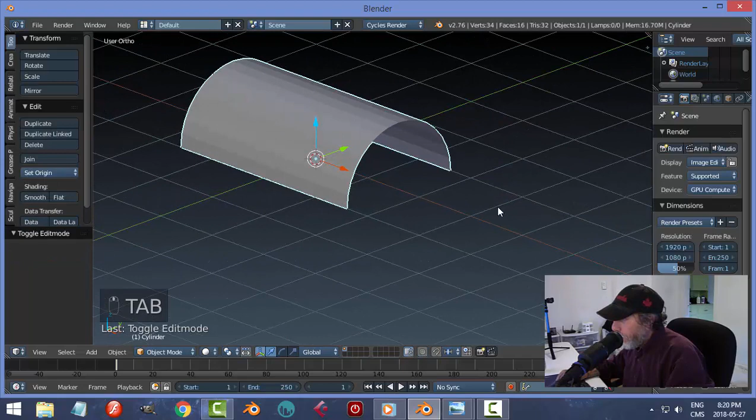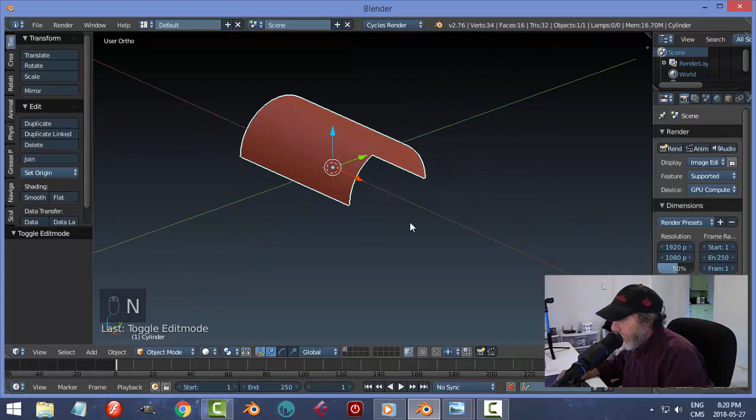I don't think I need to do anything more than that. Let's get out of wireframe and go into solid view, and actually we can go right back to object mode for a moment. Let's get rid of this grid floor. Hit N to get rid of the grid floor and choose display, uncheck grid floor, and let's switch to shading, MatCap, ambient occlusion, and we're going to choose a shader that will work well for us, that one, and close that. I'm going to be deleting that as well, by the way, soon.

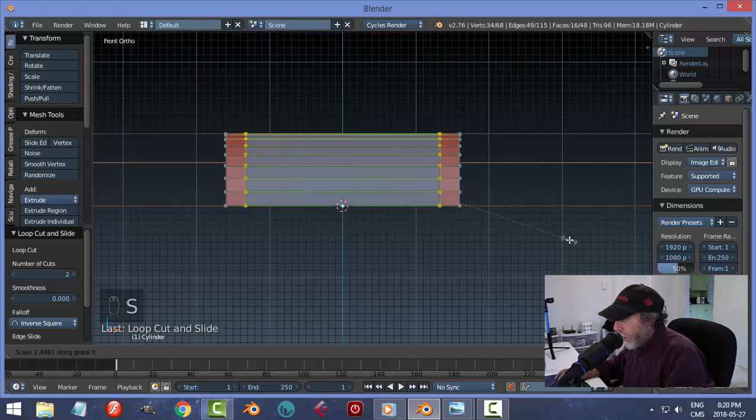First of all, what we're going to do is go into edit mode in front view, and I'm going to put in a couple of edge loops. So I'm going to go Control R. It's going to put one right down the middle, but I'm going to scroll my mouse wheel up once so I get 2 of them, and I'm going to left click and then right click to accept. I'm going to scale in the X and pull it out till I have something like that. I want to set this up so that I can do the side parts.

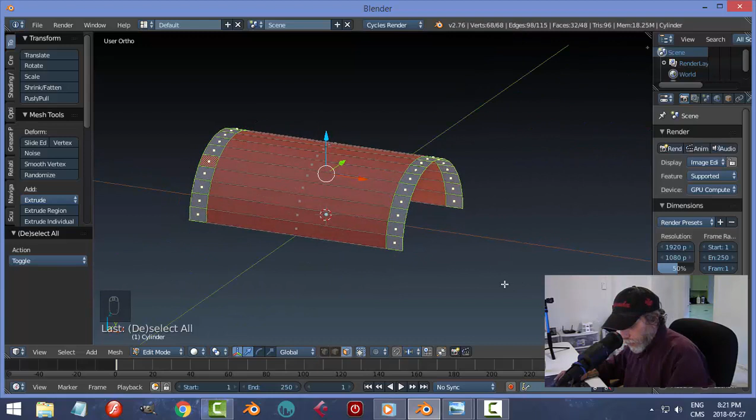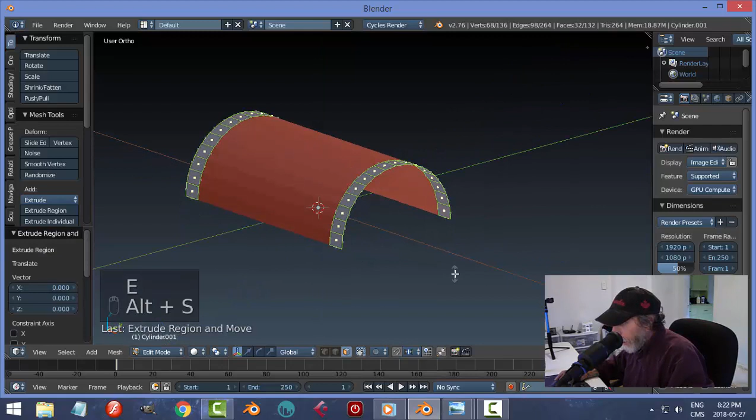Now look at this one, these things here. I've put these edge loops here so that I can select all of these polys and all of these polys, and I'm going to go Shift D to duplicate them, then P and enter, and go back to object mode so that I've made these a new object on their own. What I'm going to do now is go into edit mode and hit A to select them all. I'm going to hit E to extrude and Alt S and pull with my mouse, and that's going to pull them out. So just decide how far you want these to come out to resemble these things.

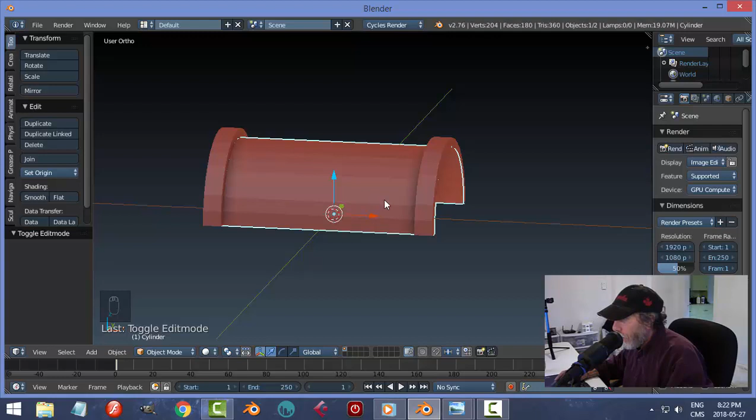All right, cool. Now I think the last thing I'm going to be doing with this is going back into edit mode, and one more time going Control R and putting an edge loop right there in the middle, accepting it and just leaving it right in the middle. I now want to actually keep that, so it's selected, and I'm going to go P and make it a new object. So I've got that.

I can now actually delete that. These are in position relatively, and I've got that. I'm going to use this to make the wood that's going to form the top of this.

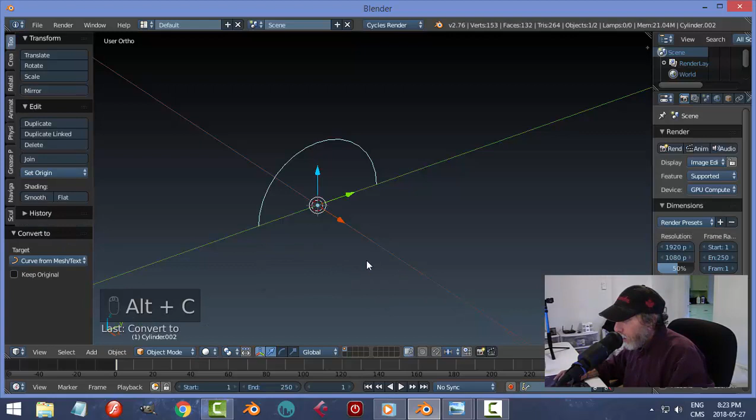I can now hide those, but in order to use this I'm going to convert it to a curve. I'll go Alt C, curve from mesh, and that will put a new icon up here that wasn't there before, this one. So I know it's a curve. Or you can go to edit mode and see that it's a curve.

Now my 3D cursor is still right in the middle. I haven't moved that, and that's great. So I'm going to go Shift A, Mesh, and bring in a plane. I'm going to scale this in the Y until it's around the width of a board that I would want to have arrayed around this curve. Whatever, just experiment with how wide you want that to be.

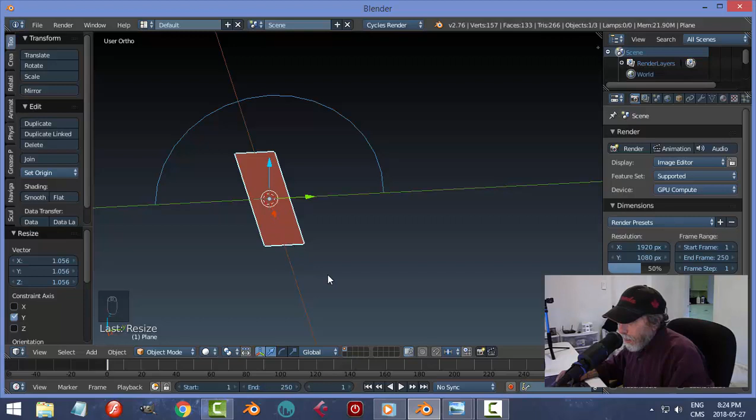But in order to bend these around a curve, I need to put more geometry in this. If you didn't understand that, just watch what I'm going to do. I'm going to go into edit mode again. I'm hitting tab and using this pie menu to switch from object to edit mode, but you can do it right down there too.

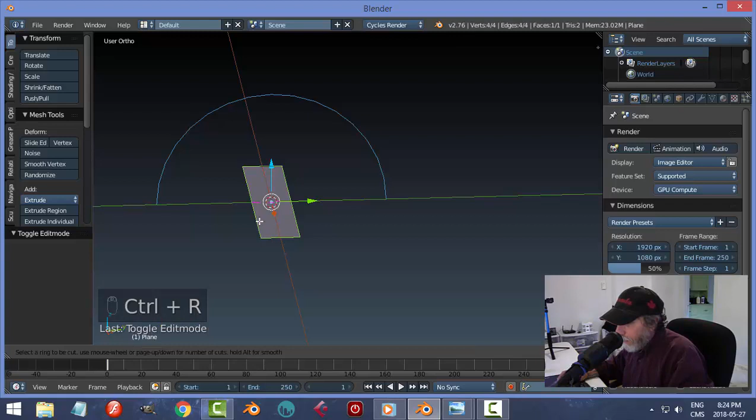What I'm going to do is hover my mouse over here and go Control R, and I want to put in lengthwise, not that kind of cut, but this kind of cut. I'm going to scroll my mouse wheel up a bunch of times and get a bunch of them. The more of these lines or edge loops you put in, the better this piece is going to be able to deform and bend, but that's good enough for now.

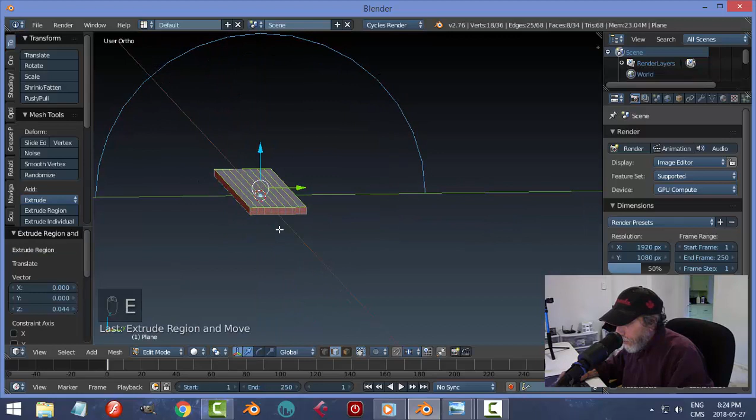I'm going to accept that, then hit A to select it all, and E to extrude. I'm going to pull up for the approximate sort of thickness of my board. I'm going to come back to object mode.

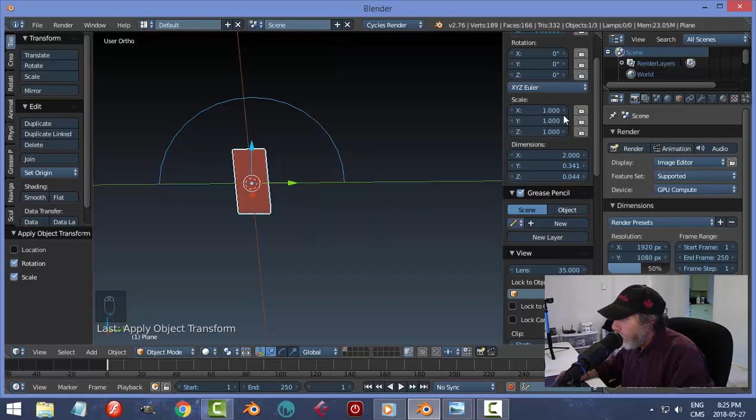Let's hit N and come up and look at the scale of this. Notice it's 1 and 0.17 and all that. I'm going to reinitialize those values because I've done some editing in object mode, and just watch the scale there. I'm going to go Control A, and choose rotation and scale. I can't remember if I rotated this plane or not, otherwise you could just choose scale. It doesn't really matter which, but watch those numbers — they go all back to 1. By having it like that, further manipulations are going to work better.

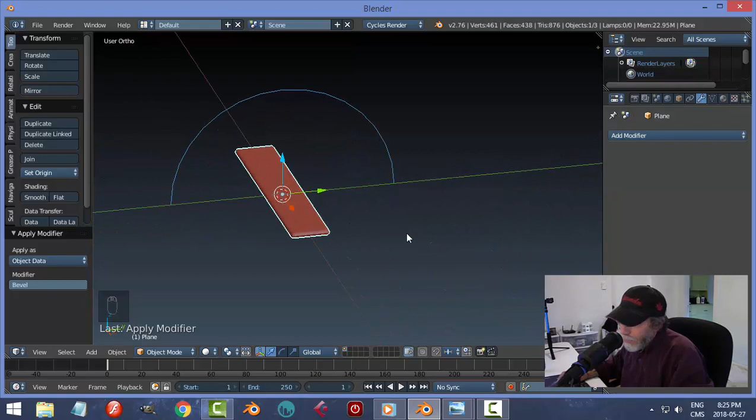With that, I'm going to come over to the wrench icon, add modifier, bevel. I'm going to switch the segments to 2, and just leave it at the default values and apply. You might think that's crazy and I haven't done any work on it and that doesn't look real, but I like this kind of toy-like plastic look right now. I'm not very good at doing realism, so I'm sort of accenting the fact that it's not real looking, it's plastic or whatever.

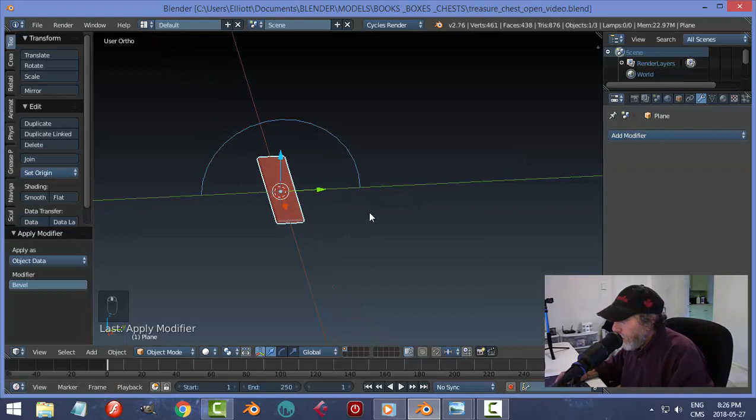Okay, so we are going to now set up an array, and I'm going to make a bunch of these going in the Y direction. So we're going to choose under the wrench, add modifier array, but in the Y with an offset of 1 and 0 for the X, so that there's a little bit of a groove there. And I'm going to bring this up to, I don't know, I'll try 7.

Doesn't really matter. There's one more thing we need to do before we can wrap this around the curve. Might as well do it right now. Go into edit mode and select. What happens is, because there's an array on, only the first one is editable — the rest are just copies, and they'll follow whatever I do to this one.

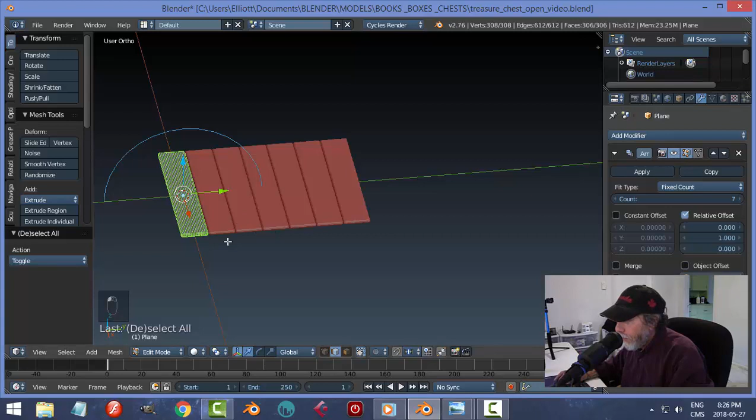I'm going to rotate this around the Y. I'll go RY 90, and then they'll stand up on their sides. I'm going to deselect, go back to object mode. Okay, we're ready now.

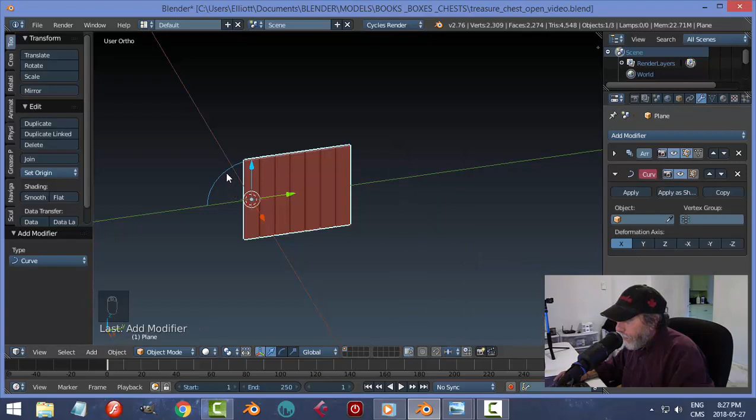I've got the array on. I haven't applied it yet because I may have to adjust that. I'm going to go add modifier curve, and I'm going to choose this curve. The only curve I've got is that curve right there. So I'm going to do that and choose Y, and you can see that it starts to follow that.

I'm going to go into side view and go Alt H to bring back my other stuff. Okay, make sure that this is selected and start pulling on the Y. Let's go back right into side view. And you can see them under there. So they've only come down to there so far. All right. By the way, if your manipulator starts to go away from the center, you can always go origin to 3D cursor and start again.

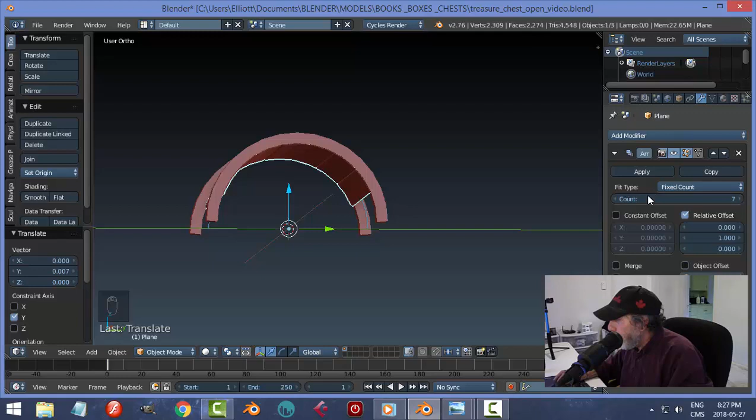You could do a couple things. You could scale, or you could add more segments under the count. So I'm going to add another one there. I think I'll try 2 more, and we'll see. Now I'm going to come back this way. That's not bad. I think I'm going to try S for scale, pull just a little bit, holding shift, and then I'm going to use the Y to go back to there.

That's probably going to be good enough because I'll be bringing up another object there to cover the very bottom of these anyhow. So that would be my wood there. I'll do some more manipulations in just a minute. So I'm happy with that. I'm going to apply the array, and I'm going to apply the curve. The curve is done. I can take these and hide them, and that blue line there is not useful anymore. Alt-H to bring that back.

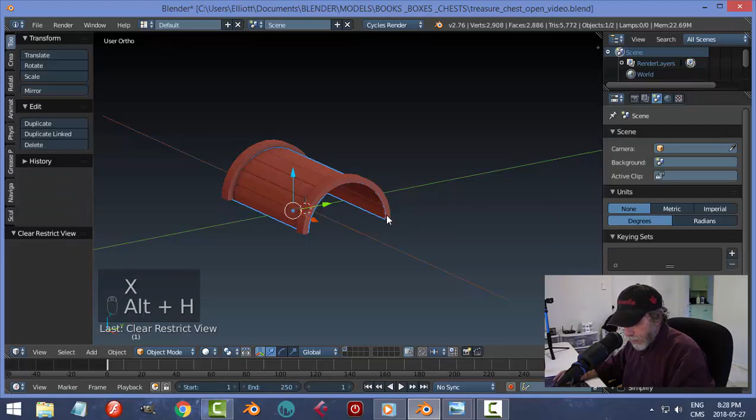Now, let's look in front view, and let's scale this in the X a little bit. Pull it like this, and let's go back. Let's scale this in the X. And it doesn't matter if it's underneath this a little bit, I don't think. We'll see how that goes. Let me just try something here. All right, fair enough. Let's go with that for the moment, and we can adjust things very soon.

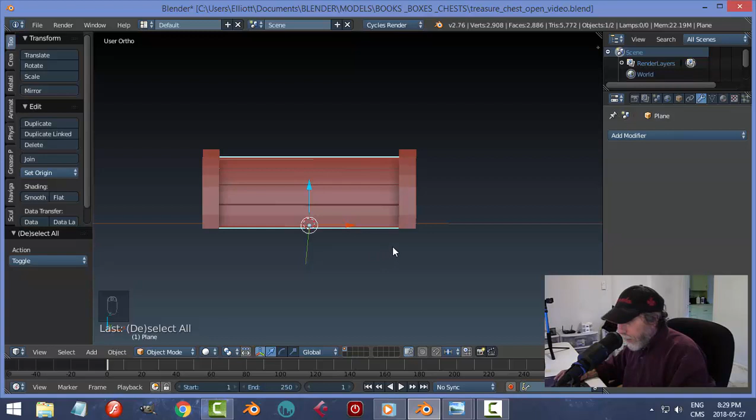Now, before we go any further, let's bring in another object. Let's go with a plane right there. Let's scale this in the X. We'll look a little closer at that in a second. Scale this in the Y. I'm in object mode scaling, so we'll apply rotation and scale in a bit. Let's look down from the top, 7, scale in the X, and I'm going to hold down the shift key to go a little slower. I just want it sticking out over the edge.

All right, and same thing for the Y. Scale this in the Y. Pull in just a little bit, so pretty close to equal. Okay, so we're going to have something like that. I'm going to pull it up a little bit. All right, let's go into edit mode for this. Make sure it's selected, E to extrude, and let's pull it down.

We'll get a little bit of discoloration depending on the direction we pull. I'm pulling in the wrong way, so some of my normals are the wrong way. So I'm just going to hit A and select it all, and Control N to flip any normals that were backwards. Now, I don't need to do any more work on that yet, all right? Instead, I'm going to work on the side pieces of wood, and then I'll do some more work on these.

So let's look at the side, and let's just go ahead and bring in another plane, and we're going to need to rotate Y 90. There it is. Let's pull it out until it's kind of in the middle of that, or some position that we like it to be in. Scale this in the Z, and we're making the wood planks that are going to go along the sides. Let's scale that in the Z more.

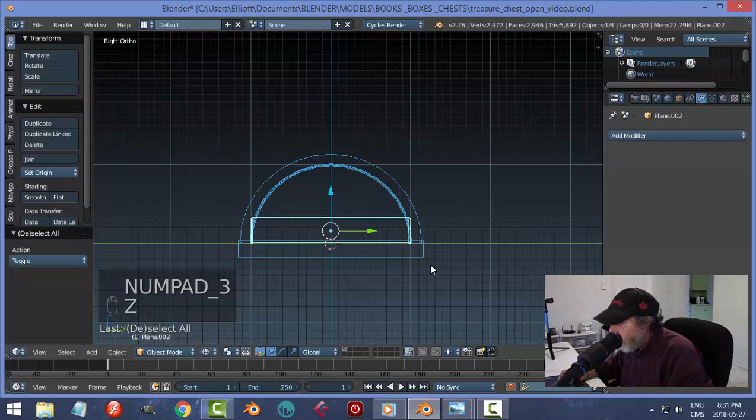Good enough. Okay, now we're not just going to copy these, we are going to array them, but I think we may need to lengthen. Let me look in wireframe. Yeah, it's pretty close. So let's go into edit mode and do this. Select it and scale in the Y. Just pull it out a little bit. So it's within the curve here, within these blue lines, but it's covering this part here, so it's fully covering

this space. All right, let's go back into object mode, and let's go ahead and hit an array. We're going to go in the Z direction of 1, get rid of the X, and I'm going to go for 3. Just make sure we hit the top and the bottom, and I think we're good.

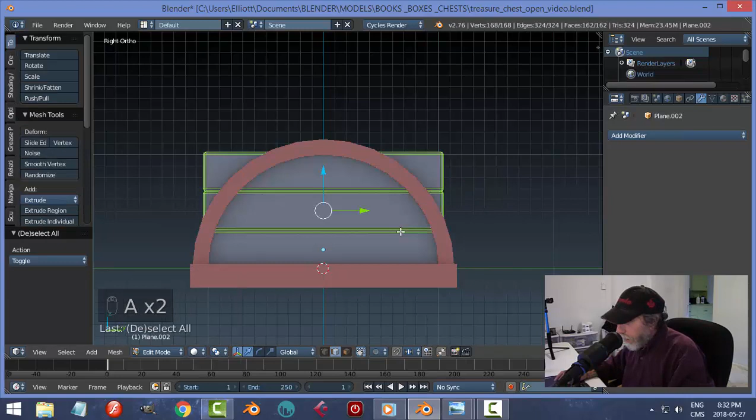So in side view, here's what we're going to do. We're going to apply that array, go into edit mode, sorry, wireframe and vertex. Let's deselect everything. Now what we need to do is we need to pull these in so that it's within the curve. All right, these ones were okay already. In fact, I might even be more comfortable pulling them out a little bit. These ones are way off, so here's what I'm going to do.

I'm going to box select those, and I'm going to scale them in the Y. I'm just going to pull them just so that they're within the curve. Deselect, grab all of these ones, scale them in the Y so that they're inside. These ones, they're all right. I'll scale them a little, make it look a little bit better. And I think I'm going to scale these ones out just a little bit, scale it in the Y, just so I'm sure that I'm all within this region. All right, now we're done. Back into object mode, and it's done. We have wood paneling on one side.

Now I want to get it on the other side in the exact right position, so I'm going to mirror this to the other side. This thing is symmetrical, so I could use it as a mirror object with the origin and 3D cursor right in the middle. So I'm going to make sure I go cursor to selected. And select that, choose mirror, and the mirror object is that, and it's put it there. All right, let's try that one. There we go, in the Z direction. All right, let's go ahead and apply that mirror and save. So there we go, it's going okay.

Let's do some work on these. Before we go into edit mode, let's add a modifier, subdivision surface of 2. And now you see it's a little bit smoother, but we've got some issues. So let's go in and go Control R over this, roll your mouse up 1 so we get 2 edge loops, those yellow lines. Let's scale it in the Y-axis, and that'll pull them apart as we pull our mouse. Not right to the edge, just close to the edge.

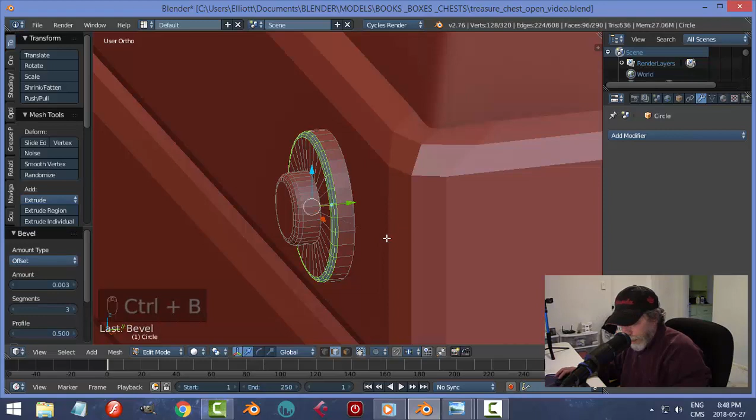Before I leave, I'm going to select this edge and go Control B and I'm going to pull back and roll my mouse up twice to bevel it. Okay, so I'm just going to leave it like that for the moment. This piece might be a little bit too, might scale in the Y a little bit. Okay, then I'm going to go Shift S cursor to selected. So my 3D cursor is now on this piece here.

Go Shift A, Mesh, Cylinder, but before I do anything, I'm going to switch this to 6. Okay, now it's got 6 sides. Rotate X 90, so it's facing that way, and scale. And it's right at my bolt, so zoom in with the period key, keep scaling till you start seeing, there's the bolt. Okay, let's scale it in the Y. Pull it down like that. Okay, that's pretty thick, so let's scale it in the Y a little bit more.

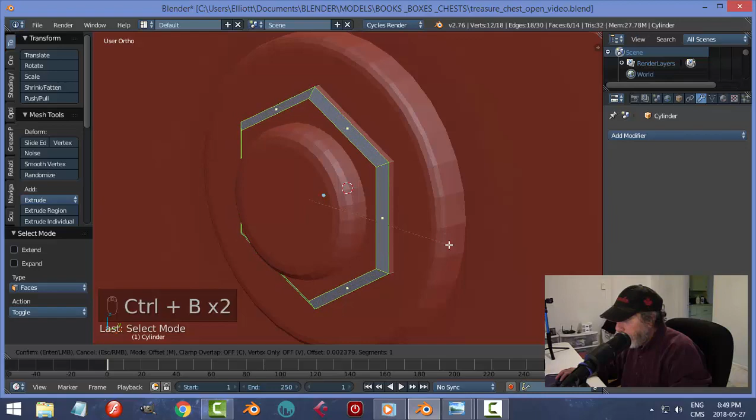And that's basically the effect I'm going for. Okay, now I've scaled this a lot in object mode. So let's go Control A, rotation and scale. Let's go into it, and we'll grab the top face and Control B, and I'm just going to pull it down like that. I'm not going to put any segments. I'm going to deselect. So I got a bit of a, I don't know, chamfered edge or whatever.

Let's go smoothing on that. And as soon as I grab this piece and join them, I change that. That's okay. Everything's going to be smooth differently. Yeah, I'm not going to worry about it. Let's just leave it like that for now. Okay, let's just look at the size of that. Well, you could always mess around with the angle and see if you get something that looks better.

All right, that's fine. Okay, let's select this piece. I joined those, right? Yeah. Shift S cursor to selected. Let's take that. Yes, I did join. That was not a problem. All right, let's mirror this. Mirror with respect to this guy, and that puts it there. And let's also do it in the Y, and that'll put them there. Let's apply. Okay. Shift D, and let's move them down here as well. We can zoom in those to position that a little bit better if we need to. That's fine anyhow. So those are going to go there.

And then let's choose whichever one. Let's go into edit mode, and I'm going to select one and go Control L. That'll select all the parts that are linked to it. In other words, the whole bolt apparatus, just one of them though. Shift D, P to make a new object. So I copied it and I made it a new object, and I can select it and it's out of the group. Let's set origin geometry, it's pretty close to there. If I move this away, see it's just a copy.

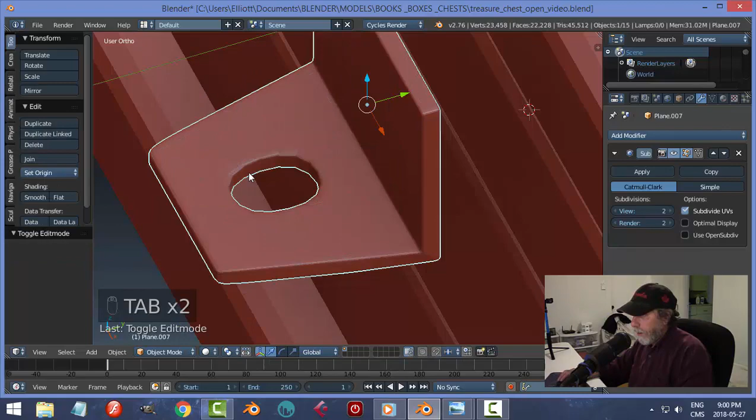Edge loop here. Edge loop here. Edge loop here and here. I'm getting there. There's a lot of detail, probably for something I didn't need to do so much. Let's do one down here, pull one down here, and pull one over here, and pull one over here. Let's see how we're doing. Not happy with this yet, but let's have a look at this so far. Even with smooth. Okay, very odd looking circle, so that's all right.

What we'll do is I'm going to look down, and in wireframe and in vertex, I'm going to go Control B to grab all this. I'm going to pull it in so it looks like that. And then I'm going to go Control B to grab all of this and pull it out. Am I doing that? No, I'm not doing that. Let's try scale this in the Y. And let's take the whole thing and scale it in the X. That's okay. I'm going to shorten it in that position. I'm going to do a little bit more work on it too.

Okay, so sorry about this part. Might seem a little bit complicated and a little bit wishy-washy, like I don't know what I'm doing. That's not exactly true. I mean, it's partially true, but I'm playing around with stuff and I can't give exact instructions, which is too bad. I probably should have practiced this more and tell you exactly what I want you to do, but it's not like that. I'm going to scale this in the X. Stop talking for a minute.

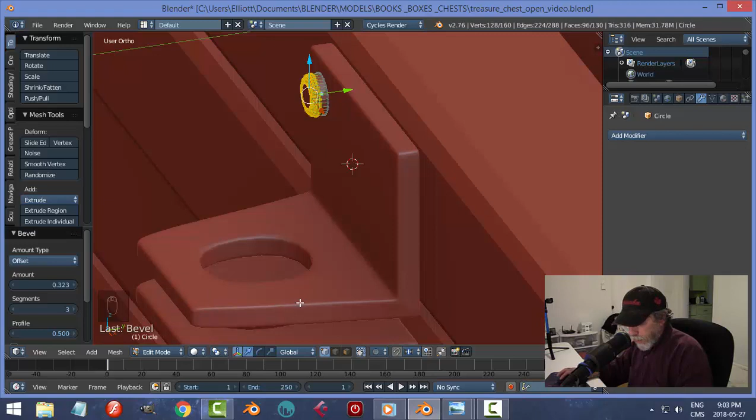Okay, scale it down. Very, very simple, but just a tiny, tiny detail. We'll have a couple of them. I want one up there. And there. Probably something like that. We'll see. Okay, have to make a face. E to extrude. Pull it out. Control B. Pull it back. And give one or two segments. Probably two. Scale that in the Y. It's a bit too thick. Hit smooth.

Okay, just where to put those. Let's just try copying it and putting another one there, and seeing if it looks realistic. Those holding it. Yeah, I think that's fine. Okay, so what I'll do is I am going to accept that, the subdivision surface, and I'm going to take these and join them. Okay, just like that. I'm going to get rid of this one. I'm going to copy this one down again. Shift D, rotate Y 180. And that's a lot of polys for that, but you know, that's that piece right there.

Alrighty, well, we're going to make a lock and then put the colors on. All right. So how do I want to do this?

It's different ways I might approach this. The cursor's right there anyhow, so I might try Shift A, bringing in a curve. Let's try bringing in, I don't know, a NURB circle. Why not? Let's scale it down. I'm going to bring it over here because it's going to be fitting in there like that. But I'm going to scale it down some more like that.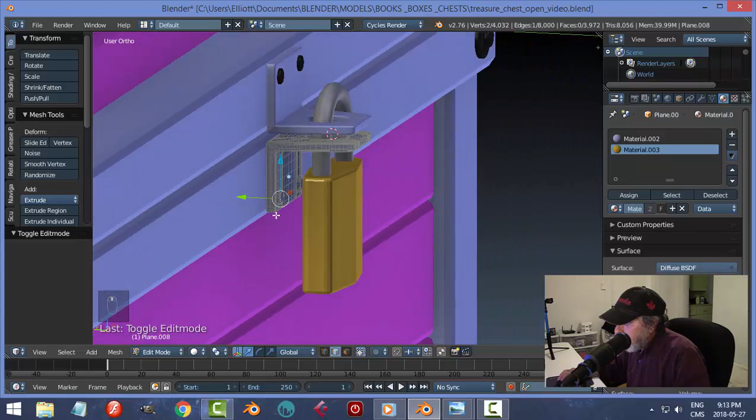Now I'm going to select a piece of each of these bolts, Control L, and choose that black as well and hit assign like that, and I'll do that for down here as well. Select a piece of that one, and that one, and choose that black and assign as well.

I can always change these. I think it's time now to start joining, so I'm going to apply that subdivision surface, and I'm going to join things together. There's nothing on it, so I'm just going to start joining.

This probably has a bevel on it. I'm going to go ahead and accept that bevel, join that, and these bolts join for the top, just like that. This piece is ready to roll, right? Okay, did I, yeah, the subdivision surface is on there.

Bolts are already joined to that. Let me just double check. That should be all of that.

I'm going to join, no, I'm not going to join these hinges. What happened to that other hinge? How did we lose it? Let's get rid of that.

Let's select this, shift cursor to selected. Let's take this, mirror with respect to that. Strange, apply. Let's set origin to geometry on those.

Let's see, I'm going to apply this bevel and grab the bolts. This piece is going to attach to this, and this will join with this bottom piece.

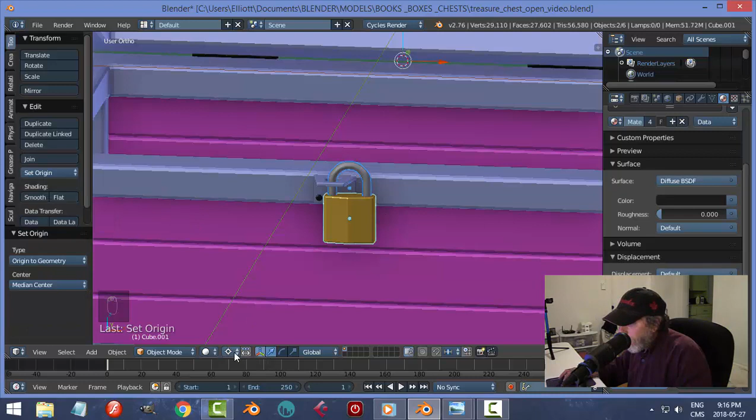I'm going to take the lock and set origin to geometry, but I've got to go back to median point, and move the lock down like that and pretend it's still there. It's locked on the bottom one, and the top one has been removed, and that is essentially what we needed to do. Alright, so we'll just get a vantage point.

I'm going to go over this and the camera. I'm going to bring up my size here, and we'll try an OpenGL render, just like that. Let's save that one. Treasure chest.

Open video one. Oh, what did I hit? What did I hit? Get rid of a period, perhaps. That's fine. Alright, we'll try one more position.

We'll go over here, we'll look down. Let's see if I get the bottom cut off there. So we got slightly different lighting.

Let's compare to the original. Alright, I did a couple of things a little bit different. This piece ended up a little bit different. Still, you know, I like it. It's cute. So thanks for watching.